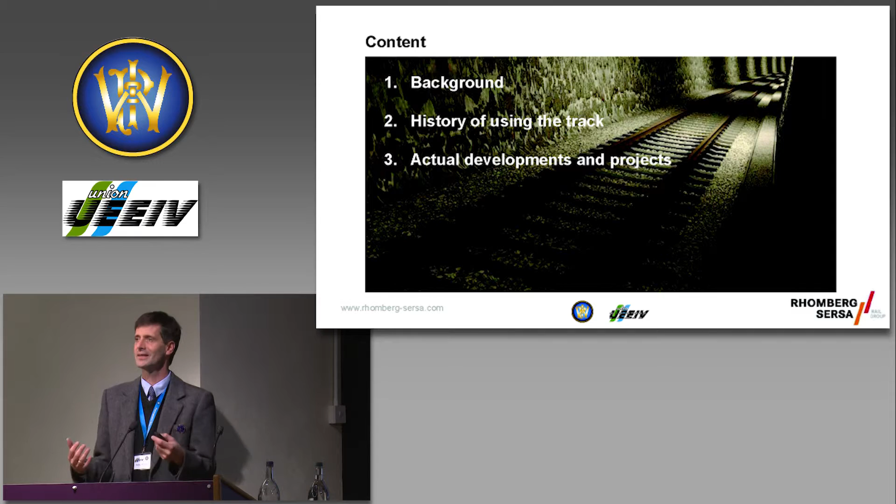I would like to share now the experience, our history, how we approach it, giving some examples, some projects which we already did and others which are under investigation and development. And I would like to invite you to understand how we lost our fear of applying these new solutions.

What's the background? It's quite simple. The desire: you have an old track, you want to remove the ballast and put slab track in. Perfect, next. Unfortunately, it's not that simple and trivial. And there's one factor which people sometimes forget. It's not just the track and the structure itself, it's the subsoil.

Because if you have an old structure, an old tunnel, an old situation, and the area is full of mud underneath the tracks, you also have to think, what do you do when you detect some problem underneath? What do you do if you have some renewal during the night shift hours and detect a problem? You need a solution.

The desired solution, and that's where we focused, our principle is, if possible, to use the track also during the construction time, meaning you leave the track as it is and maybe some parts not finished, then you are much more flexible and the risk is reduced.

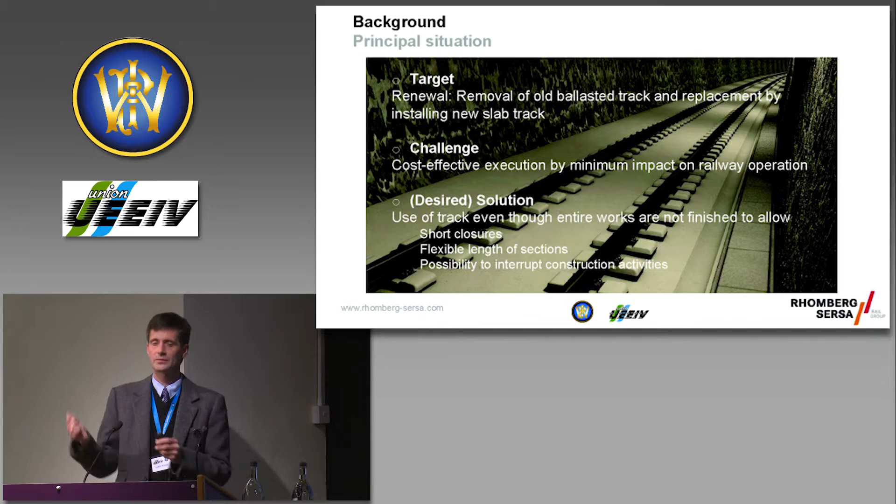I put the comparison at the beginning. The traditional approach, and everyone knows it, is you have a track, you have some engineering hours, the last train is passing, and then people start there, run there, do their work. 20, 25 people on the same spot are trying to do whatever they can do, have no chance to really realign something, and they maybe can do some repair.

And the situation is not special for the UK or for Austria, it's everywhere the same. What can you do? How can you achieve a better performance? How can you be more cost effective? Because of course slab track is, compared to ballast, the more expensive investment at the beginning, but then you have to do it so properly and so well that it has the better life cycle, the lower life cycle costs, and achieves the expectations you want.

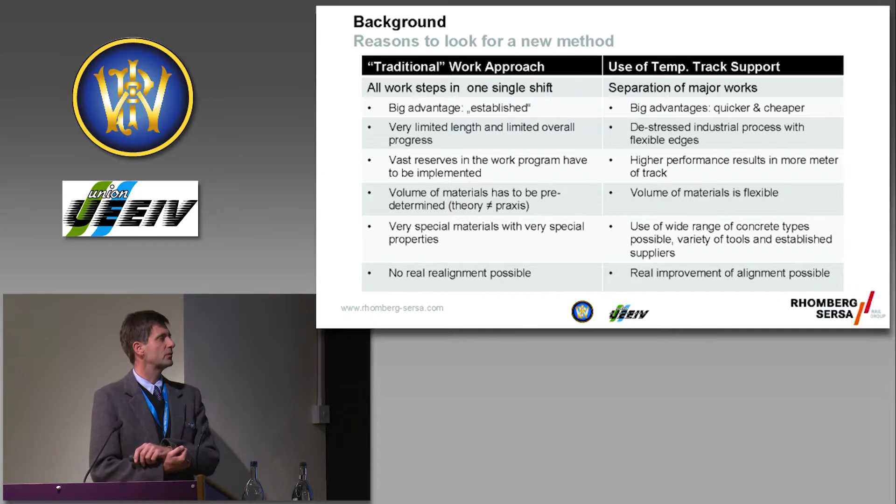Also a big problem I want to mention is the material distribution. If you come to a site, it's almost impossible on an existing track to determine exactly the number, volume and weight of material to take out and to bring in again. You always need reserves, and all these reserves make it very difficult. So how can you use this track, or how far can an existing track be used?

And I want to start now more than 15 years ago, it was in 2000. This is from the slab track construction of Cologne–Frankfurt. And I remember when I started there and we presented our adjustment system, how we wanted to adjust the track and how we used it, the first reaction was, that's not possible. And the reason it wasn't possible was because it was never done before. So we learned to work on these things and, by experience, to come up with it step by step.

So we started there with a track for 300 kilometers per hour, a superelevation of 170 millimeters, and wide parts we did without any bracing. The track was just swimming there, even though we used it. And with measurements, stress measurement, temperature and all these things, we could show that it's possible.

One thing I also want to mention here, you see the bowling ball at the upper right. Also a discussion if you're working in engineering hours is how quickly the concrete is able to bear your structure. And we implemented this bowling test instead of the nail groove which was used before. The bowling test just showed the footprint of the ball, showed how hard the concrete was, whether you could already release it and put the weight onto the track, and release the fastenings to allow the rail to move to avoid cracks.

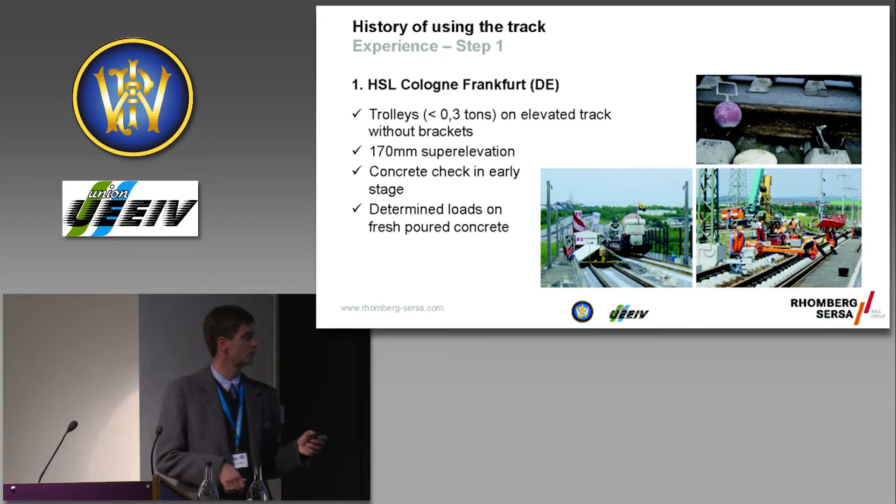The next step was in Switzerland. We had a long tunnel, almost 5 kilometers, and we dared already to go on the track with a weight of 2 tons. And maybe you see here, these are the little adjustment devices from that time, built up on little prefabricated concrete elements where the structure of the slab track was resting on.

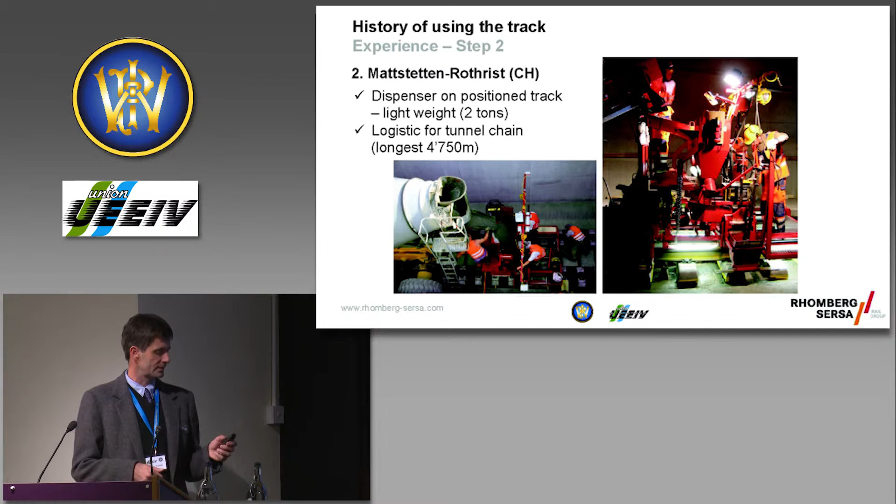Next history: Nuremberg–Ingolstadt, also 300 kilometers per hour. For the high performance, for the daily output, we required an intermediate buffer of 10 cubic meters, and the weight was more than 25 tons. How to put such a weight on a just elevated track which is supported every 1.3 meter or every 1.9 meter?

And the solution is, and this you always have to keep in mind, that's the reason why it's easy: if you avoid negative forces which lift up the system, your system is stable. As soon as you put one force in between which is too big, you damage everything you did before. With this solution we were able to run on the track, and you see the tent, that was for protecting from sunshine and rain, to equilibrate a little bit the forces. With this system we went on, and the quality afterwards was as required and as desired.

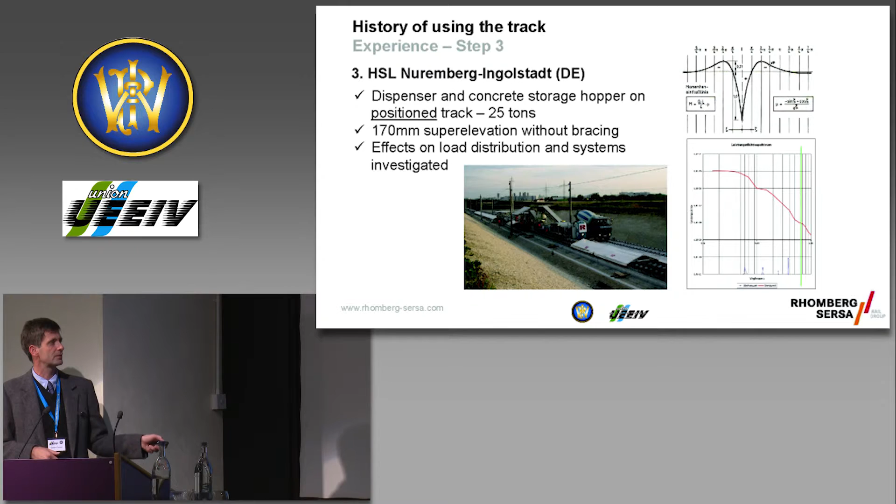We also explored, of course, the impact of our supporting systems resulting in systematic failures. And you see just from the line, even if you're not familiar with the graphic, it's very low compared to this line.

Then came our, at that time, biggest project for Rhomberg, and we already worked with Sersa together at that time. It was the 50-kilometer long Lötschberg base tunnel. It was a single tunnel, and up to 25 kilometers we had to supply the concrete in the tunnel. That meant: how to get into the tunnel, how to achieve higher speeds on the just as-built track.

It was a combination of two things. We elevated the track up to 2 kilometers and ran with a very slow speed. We ran the transport trains, conventional freight wagons, over it with the concrete. And we could arrange with the client a benchmark for the concrete strength: after reaching 10 Newton per square millimeter, we were allowed to use the track for lighter axles, and as soon as it achieved 15 Newton per square millimeter, we could use the conventional freight trains.

Sorry, may I take a quick sip?

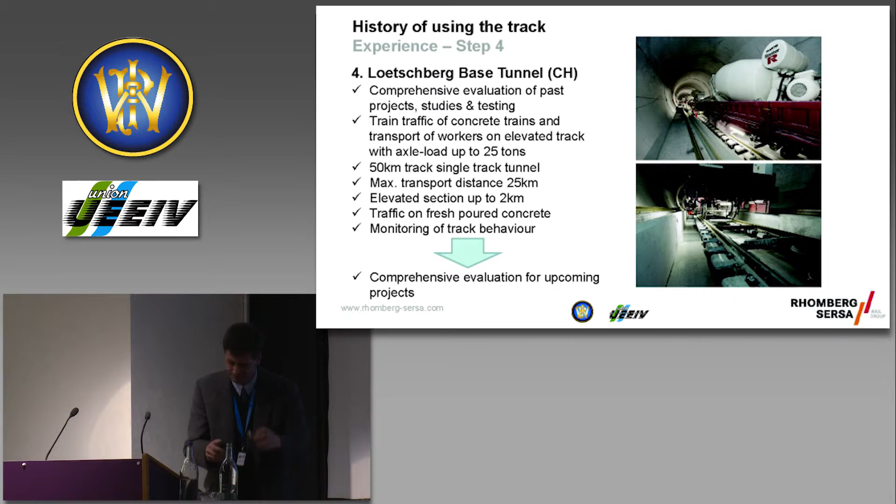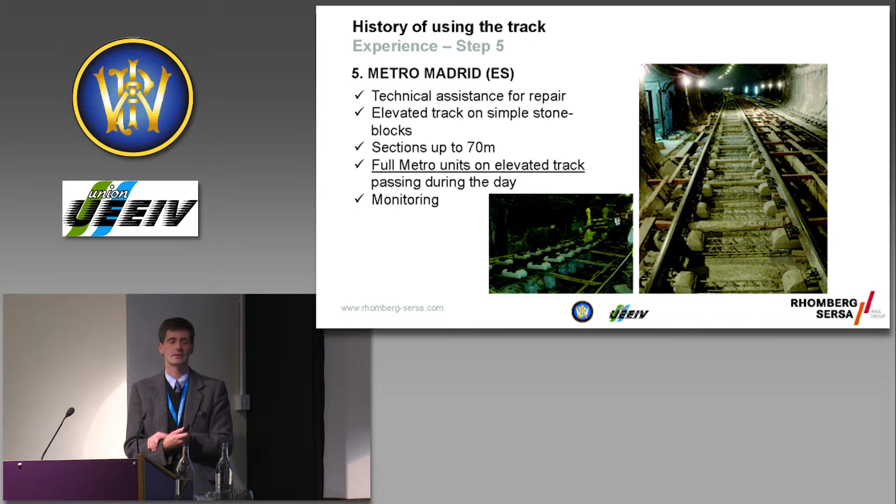This is now a project we had just been involved in as a consultant. We did something similar in Zurich on the tramway. They needed the line during the reconstruction to bring the people to the zoo on the weekends, and we could go on the elevated track. Here, they did it all in Madrid, in 2005. They were quite brave. They just put stone blocks underneath together with some shims to lift up the track, and they ran the metro cars during the day on it and reconstructed it at night.

Another important project for us was the 10.6 kilometer Arlberg railway tunnel, built in 1884, so it's 130 years old. We had to take out the old ballast, bring in the slab track Austria system, and at the same time lower the track and do some works at the tunnel to get a wider clearance profile. Here we could develop equipment and machinery to dismantle the old track and bring in the new slab track, all next to the live track, passing more than 90 trains per day on the other side.

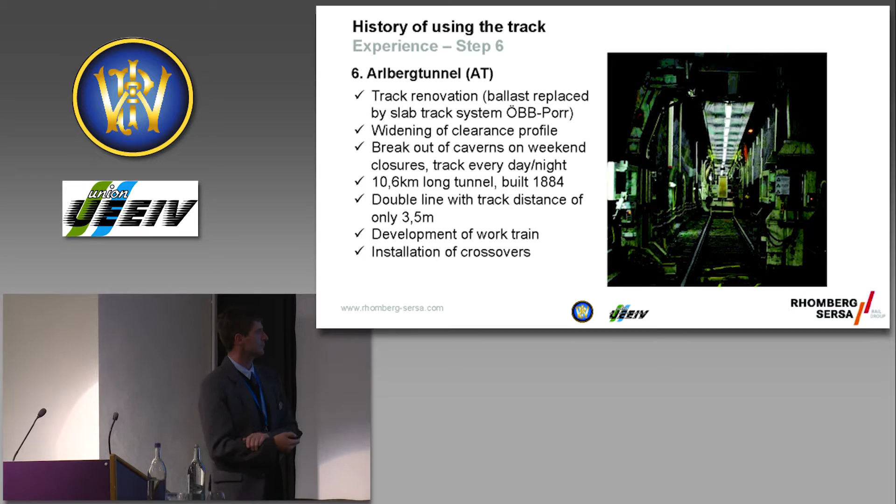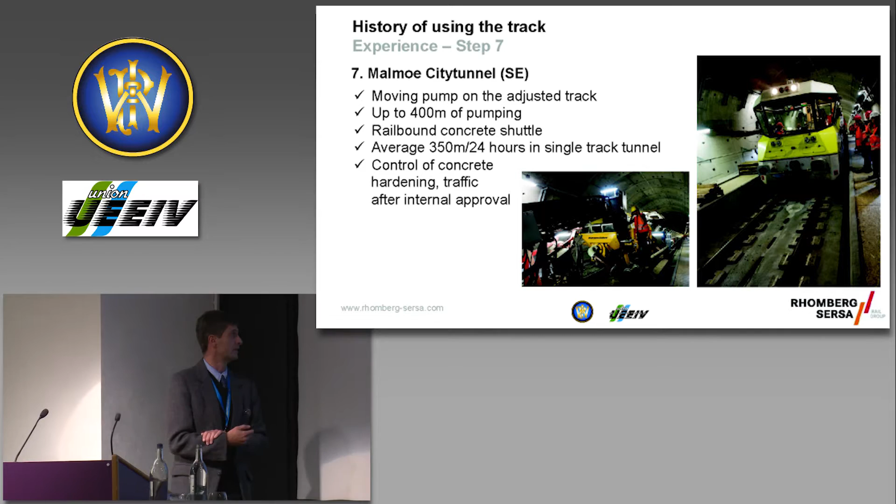Last but not least, we had a project in Sweden, in Malmö. We were running on the freshly built track. We had a pump line running on it up to 400 meters, and we had to use the freshly poured track immediately for the concrete supply. After 16 hours we could go on using this track, moving forth like an Egyptian method, and we had an average of 350 meters per day, which in a single bore tunnel was quite a good one, with one work shift under the Swedish working laws.

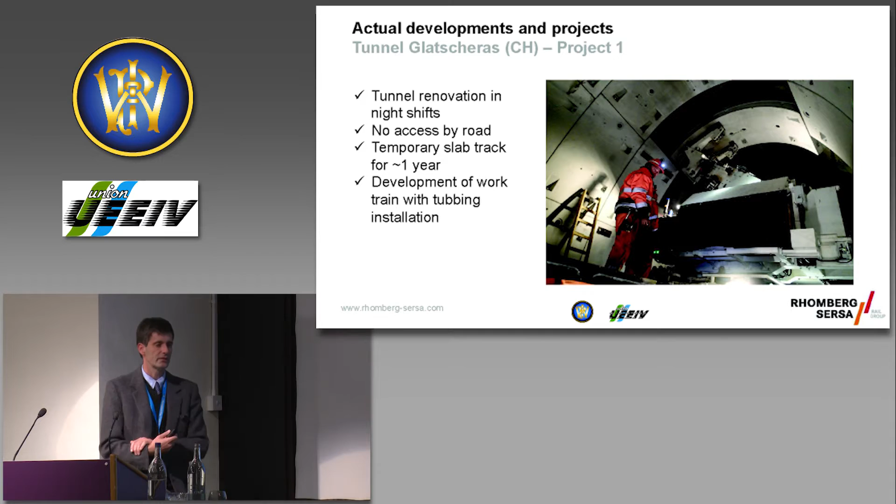This brings us now to recent projects. Slab track is just a part of it. I mentioned the Glatscheras project. We developed a cantilever system to put the tubings in relation to the new track. I mention it because we were allowed there, on the Swiss narrow gauge Rätische Bahn, to leave a temporary slab track for 1 year. They allowed us to cast in embedded sleepers and leave them for 1 year, and they're using it during that time. And so you have the possibility to renew the tunnel.

The second thing now, please don't take out the cross and the garlic. It's maybe a little bit new, and I would like to explain it.

Unfortunately, we didn't build it in at the moment. We have a Russian joint venture partner, a subsidiary company of the Russian Railways. They want to implement the solution for using a track for overnight possessions on the Trans-Siberian and BAM line. And of course, like everywhere, they are very cautious.

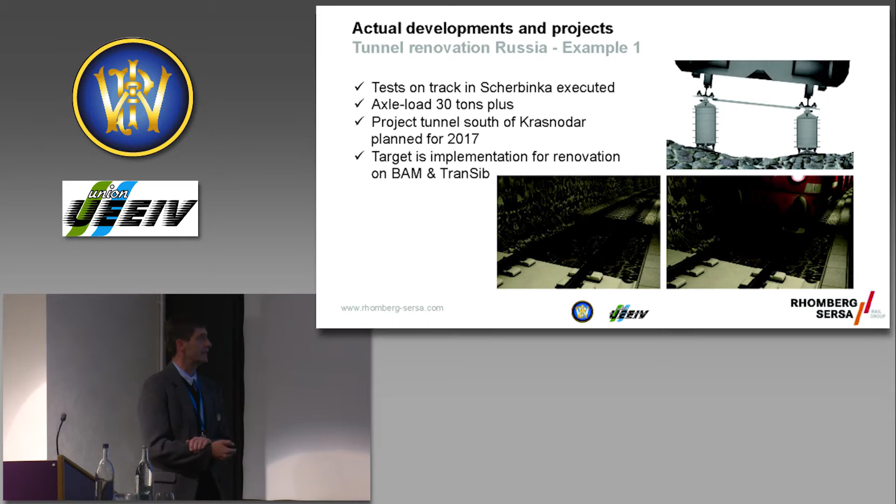And I don't mention now the bracing. This is for a very low speed during the daily hours to bridge over this gap. Everything, of course, depends on the length of the gap and on the speed. But what is the important principle? You try to avoid horizontal forces.

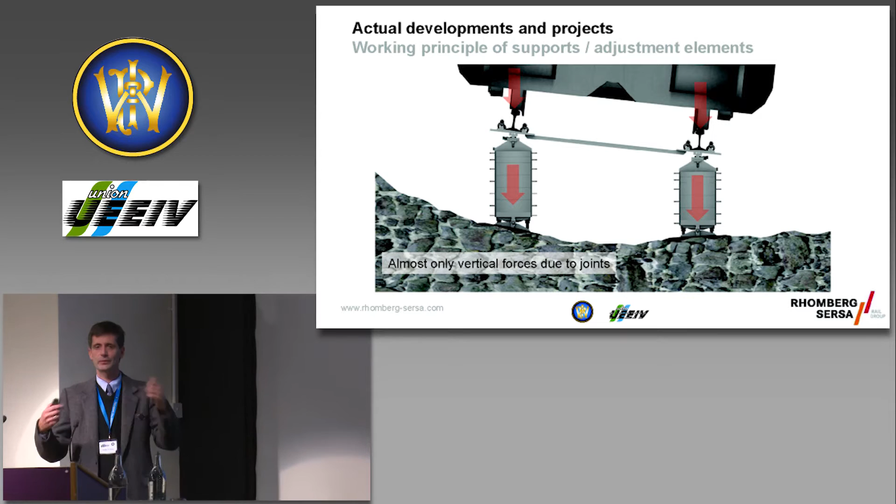As we always try to avoid tensions in the track, we avoid the lateral forces by having joints. This is just for protecting. These are steel shims, and this is the conventional system holding the track in place. As said, the braces are a different topic. For lower speeds and always just a gap of a couple of meters, you won't require it.

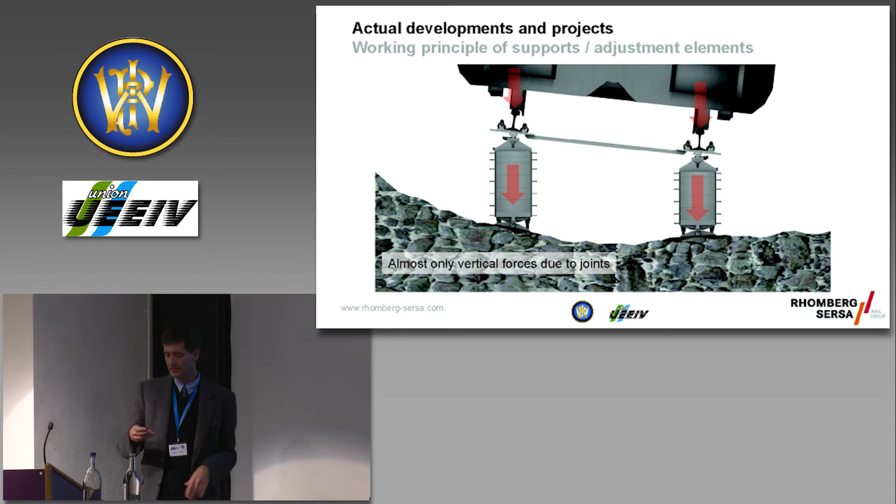Another possibility to approach it: these are pictures from Asfordby in the UK. We had the chance to implement our system, our IVES system. It's built in this case on the asphalt layer. It's also the question, if you don't have just the overnight possessions, maybe you have a weekend, then you can think of other solutions. Then it's easy to use prefabricated solutions.

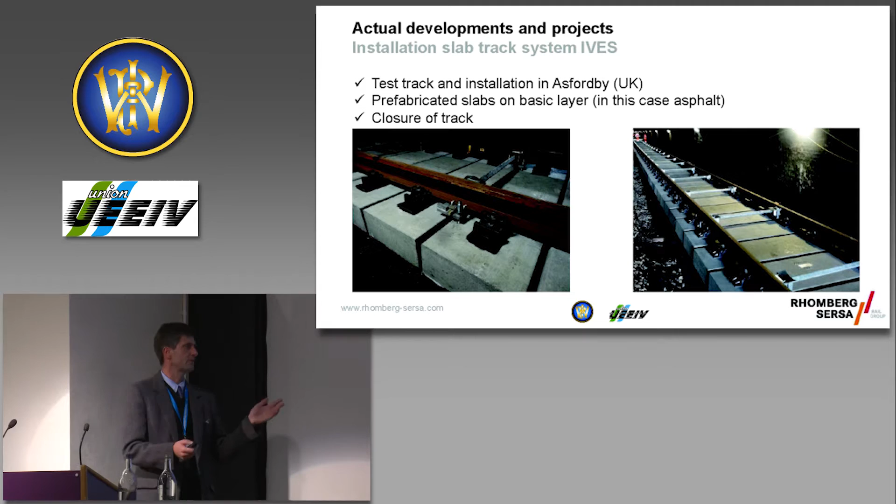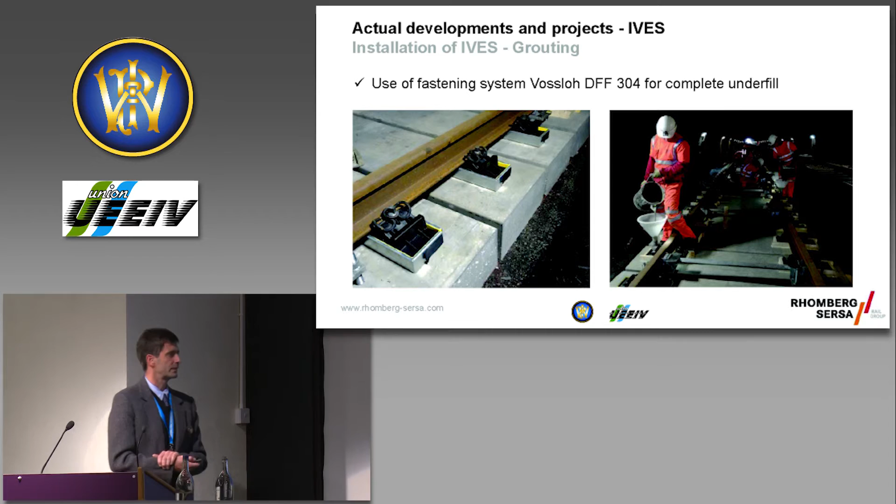We developed together with Vossloh the DFF 304. The special quality of this system is that you always have a complete underfill. You need a rectangular formwork, which is quite simple, and you can fill in normal cementitious grout. And independent of the superelevation, you are always sure that the base plate is entirely underfilled. Many people will be familiar with this problem: what happens if it isn't?

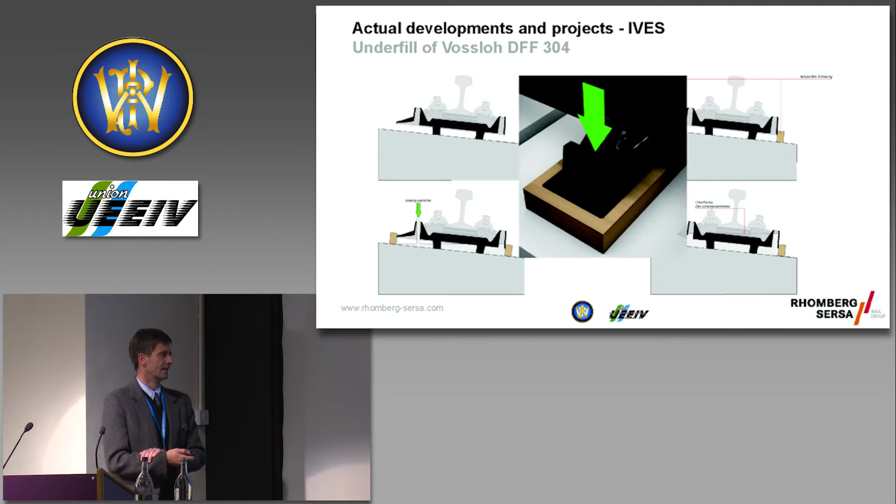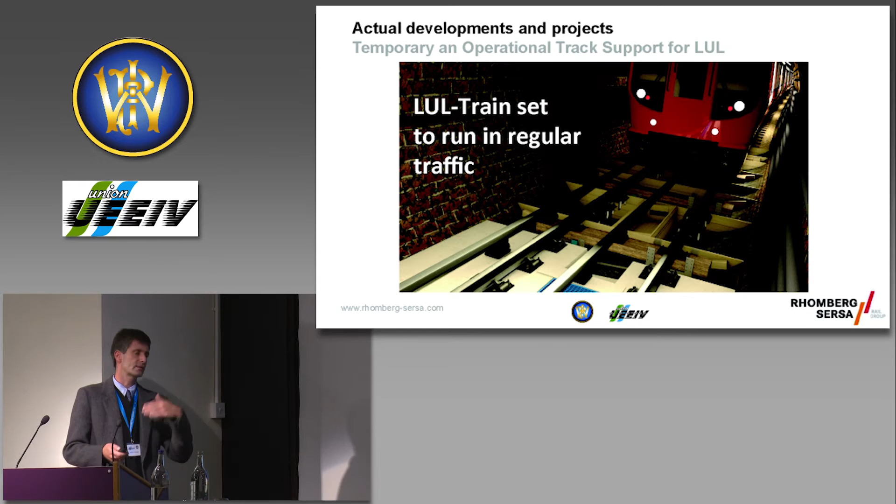It should just demonstrate the situation in London Underground, to have an open gap where you're able to do works underneath, a gap where you would also be able to improve the soil if something happens. We are convinced that this concept could help to reconstruct track in sensitive areas. In this case, we used the existing wooden sleepers, with the same principle of the joint to avoid the moment, putting shims underneath and just screwing the element into the sleeper.

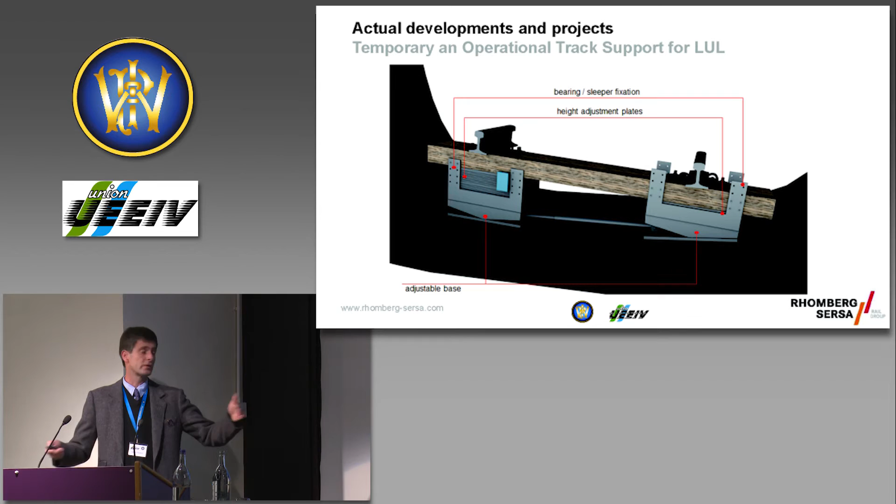We believe that with these solutions we are able to realign track, because usually, as I said at the beginning, if you just open 2 meters and don't do anything, you have no chance to do a real realignment and improvement of the track. This is a picture from our test track where we went back and forth at higher and lower speed, to see in the curve with superelevation how it moves.

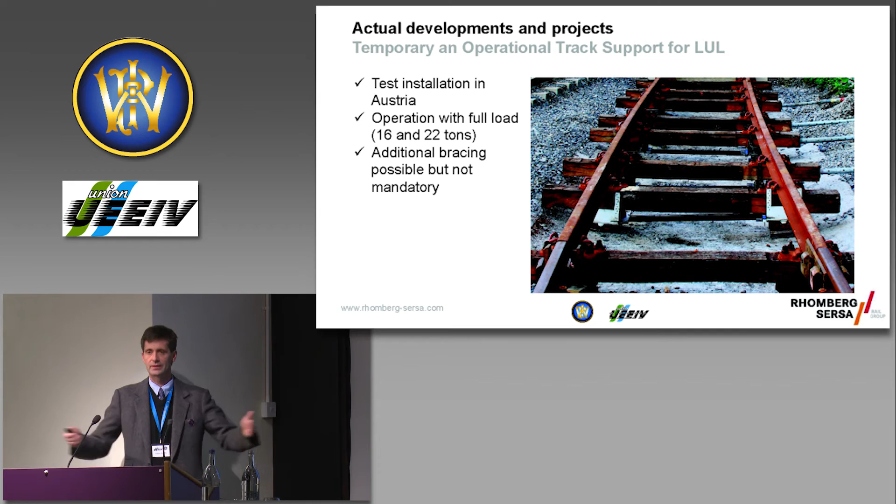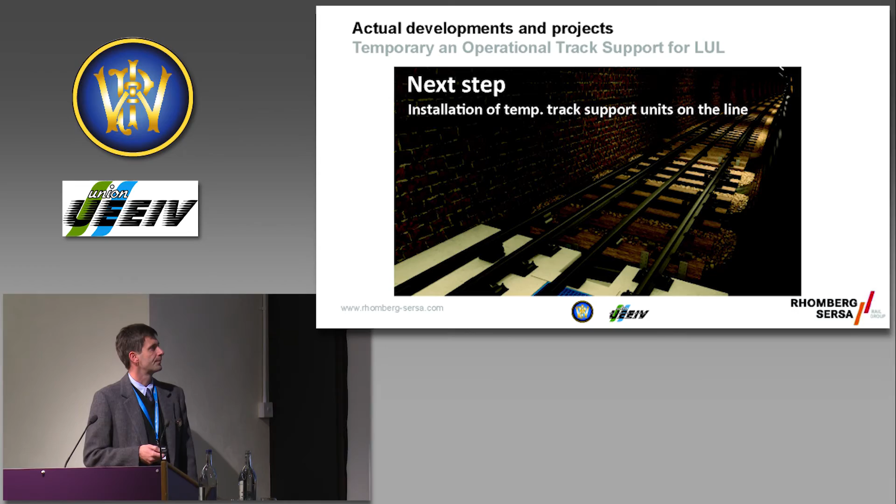My proposal everywhere: test it somewhere under realistic conditions, do all the measurements you can to feel safe, put on some safety factors, because we're always talking about loads and pressures which have to be transmitted to the environment. I hope this works. Until it looks like the end and the train is able to pass over, a lot of steps are necessary.

I tried to give a little background of how we are thinking, how we approached this topic of slab track construction, similar to the Austrian railways. I have to thank, from the bottom of my heart; sharing experience is very important, and we have the luck to share experience which was made in our country during many years. Otherwise, it wouldn't have been possible to develop this know-how, and we really do hope that you also take advantage of this experience.